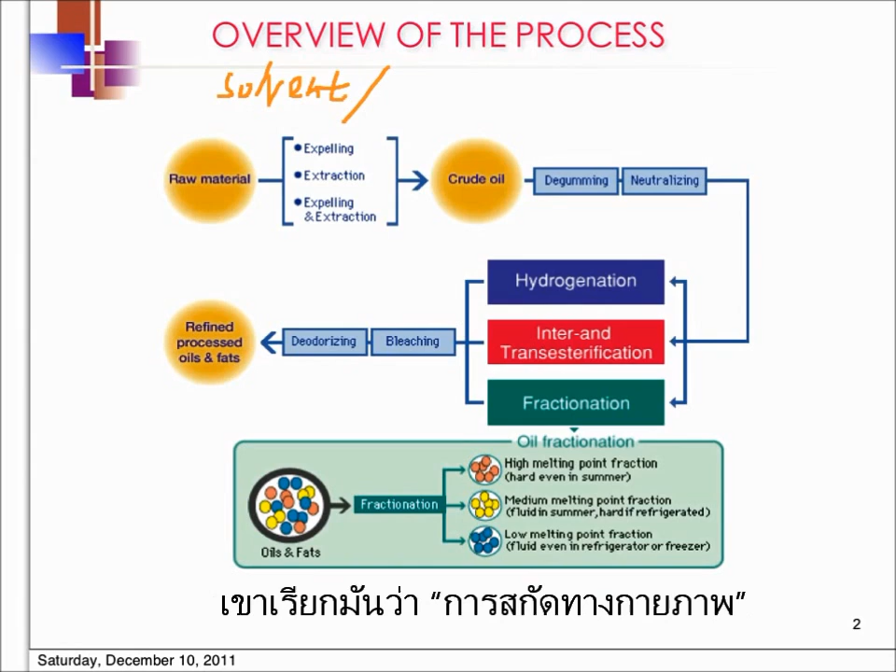So for this purpose, we can use two types of extraction. We can use an organic solvent. So this is a solvent extraction, which will extract the fat or the oil from the fruits or from the seed. And another process is without using solvent, which basically we call physical extraction. So usually this is using a mechanical press, for example a screw press, to expel or to extract the oil physically out from the seed or from the fruit.

At the end of the extraction process, what we'll get is the crude oil. So the crude oil usually contains a lot of undesirable components such as free fatty acid, FFA, or it can contain phospholipids, pigments, and a lot of moisture. So this is something that is undesirable.

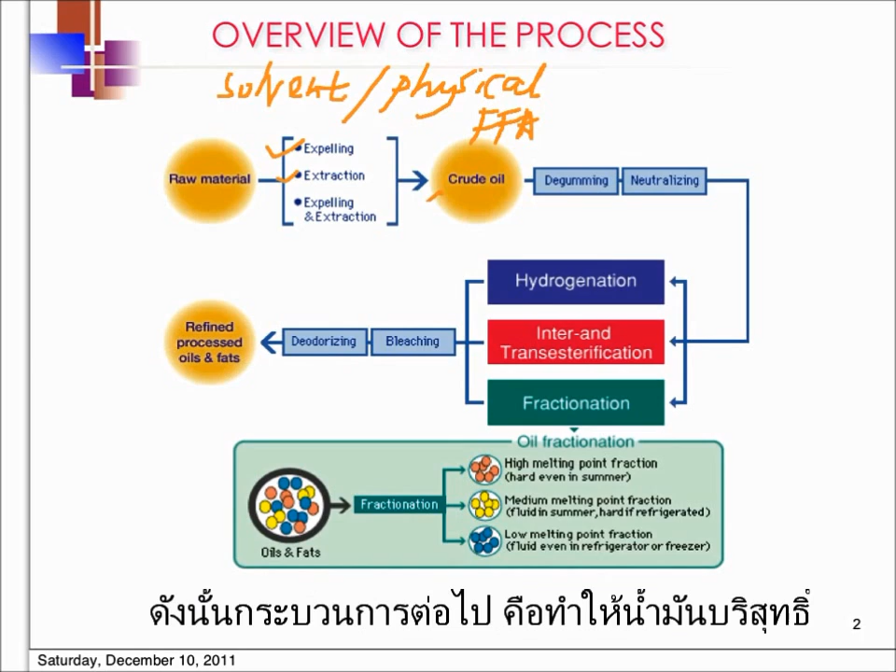So the next process is to purify the oil, and basically this is what we call the stage or the process of refining. To refine the oil, to remove as much as possible the undesirable components from the crude oil. So the first stage of the oil processing is to extract the oil to get the crude oil. Then after that, refining.

Then the second major stage in the oil processing is the modification. The objective of modification is to modify the properties of the oil to produce oil products with different physical properties. Some of these modification processes are, for example, hydrogenation. This is a very widely used process in the industry to increase the melting point and solid fat content of the fat. So usually we use this process to produce a product like margarine.

Then there is also the interesterification process and also the fractionation process. So the idea of this modification process is to produce various types of oil products which have higher value and which can be used for many food applications.

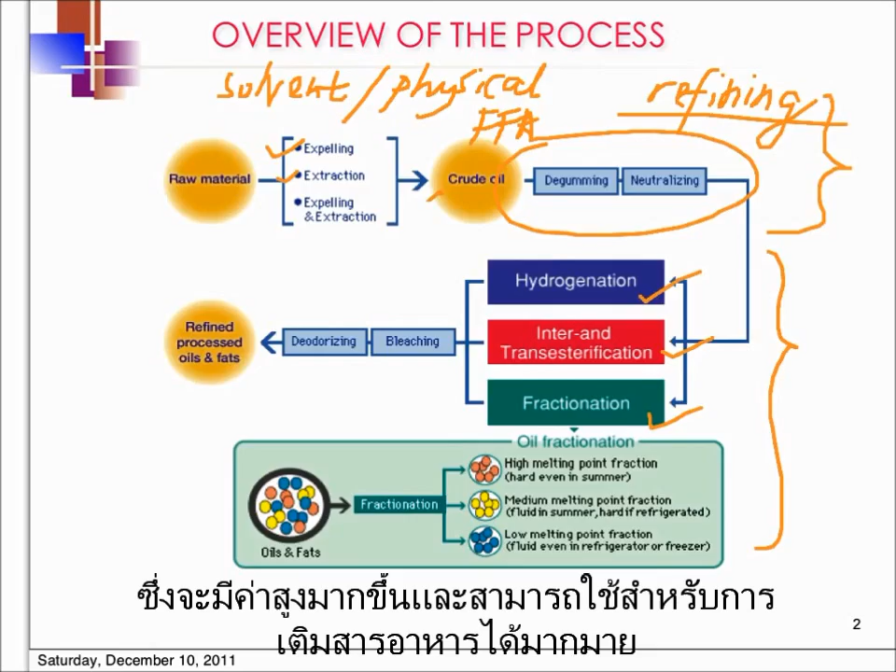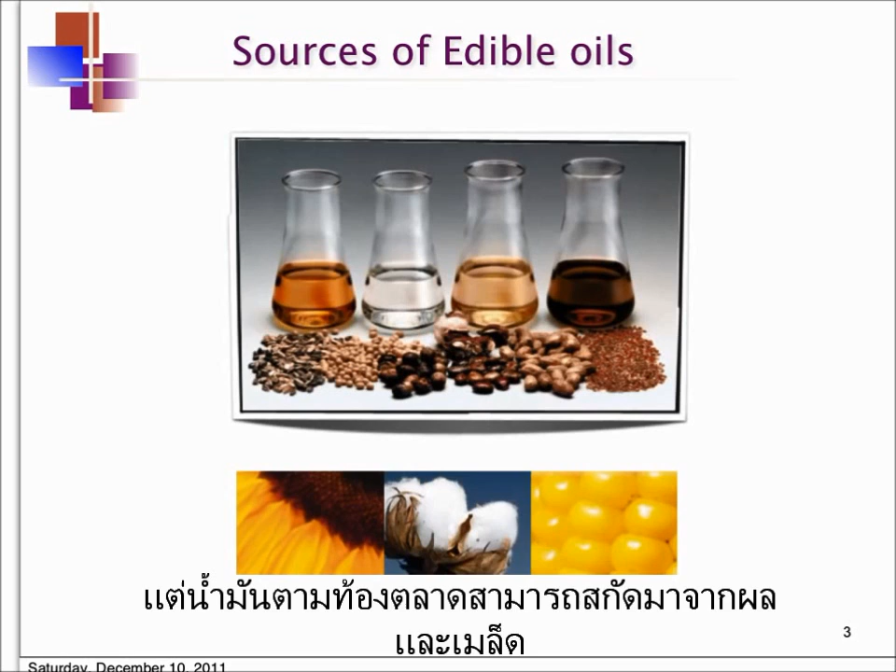You may be familiar with a few types of vegetable oil, but commercial oil can be extracted from various types of seeds and fruits. So for example, on this slide you can see that oil can be extracted from the soybean, from the oil palm fruits, from canola, from sunflower, from the coconut flesh, and from the palm kernel.

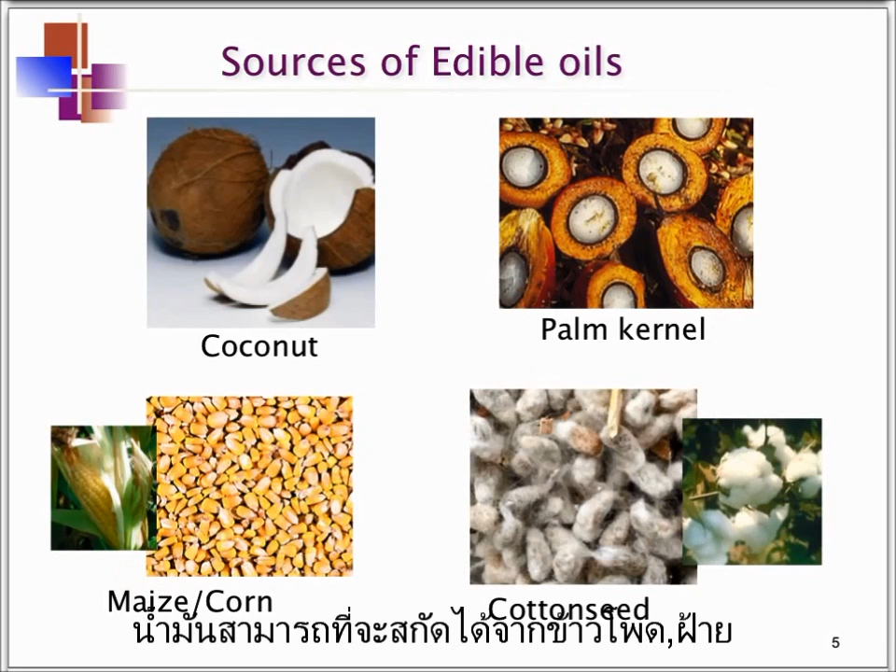So for the oil palm, this is the oil palm fruits. The red, the orange flesh outside is from where we can get the crude palm oil, and the white flesh inside, this is actually the palm kernel, and we can extract the palm kernel oil, which has different physical and chemical composition, from the palm kernel part. Then oil also can be extracted from corn, from cotton seed, from olive, linseed, sunflower, safflower, and from castor.

The tree is still not very tall, so you can see the fruit bunch between the fronds like this. So you have to be very careful because there's a sharp thorn between the fruit bunch. If you're not careful, you can get your fingers or your hand injured.

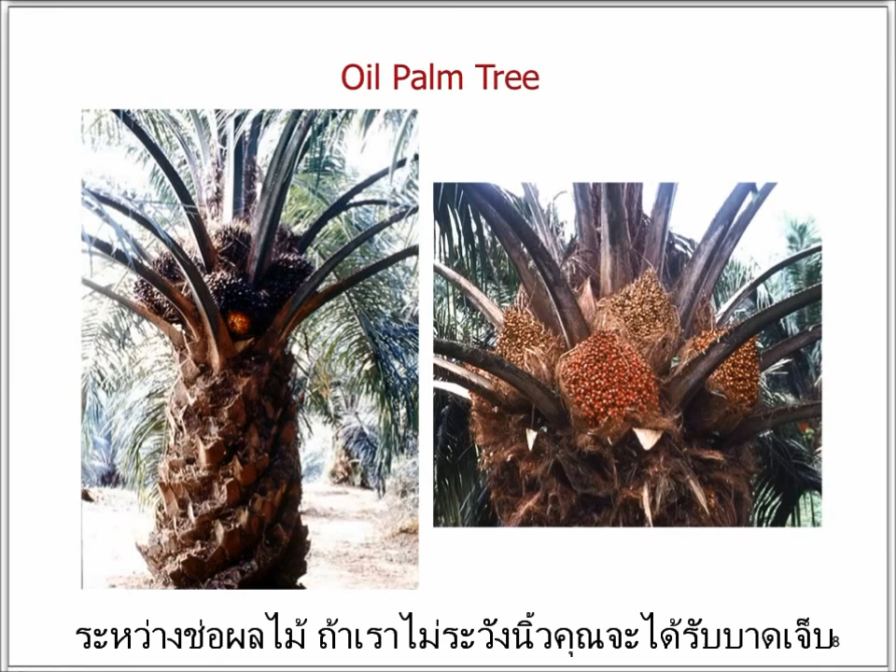So after the extraction, from the mesocarp or the outer flesh, we can get the crude palm oil. The color is very dark orange, and here you can see in this picture the oil has actually separated into two layers. The bottom layer contains a lot of insoluble components or phospholipids and other things that need to be removed, and the upper layer is basically the oil.

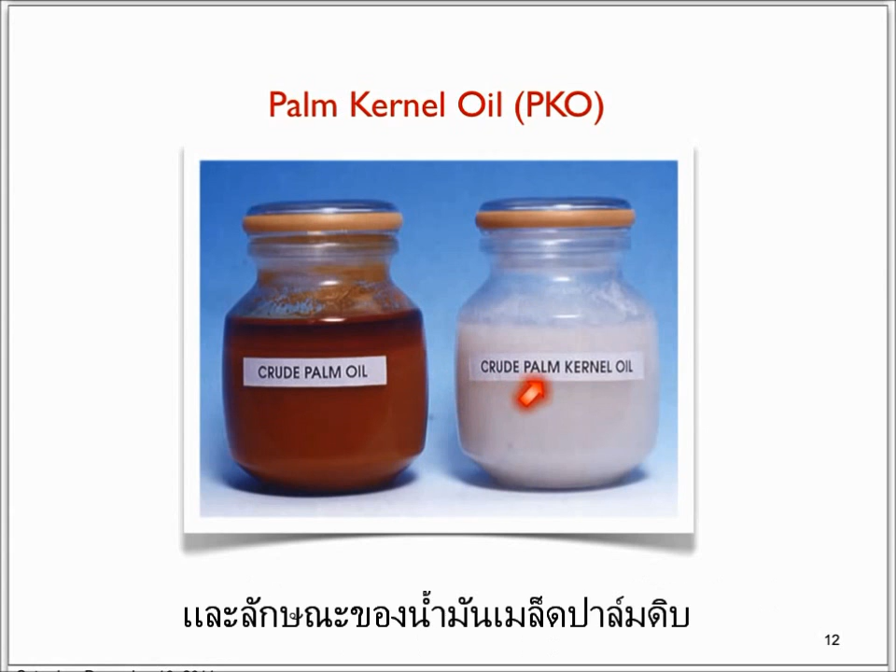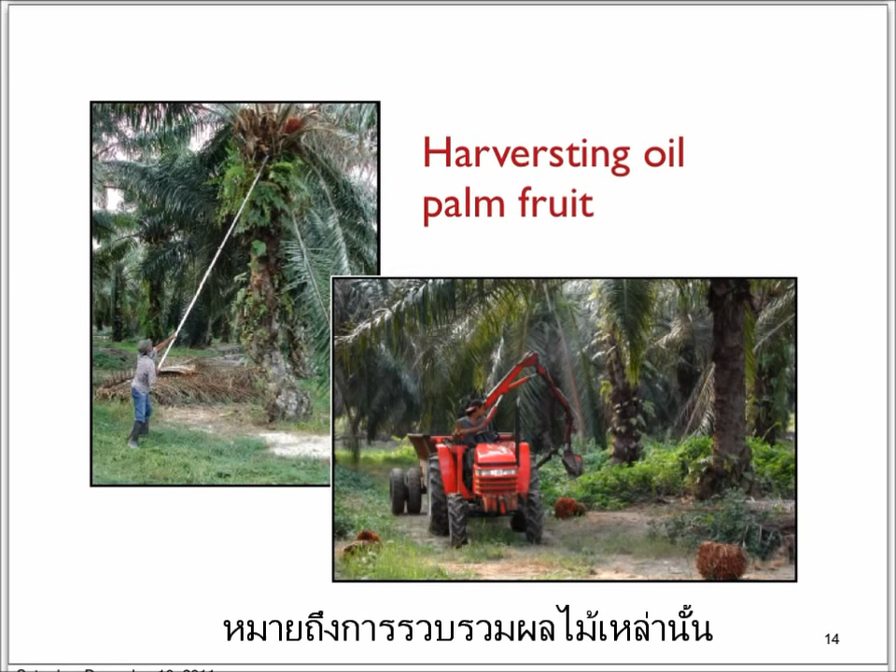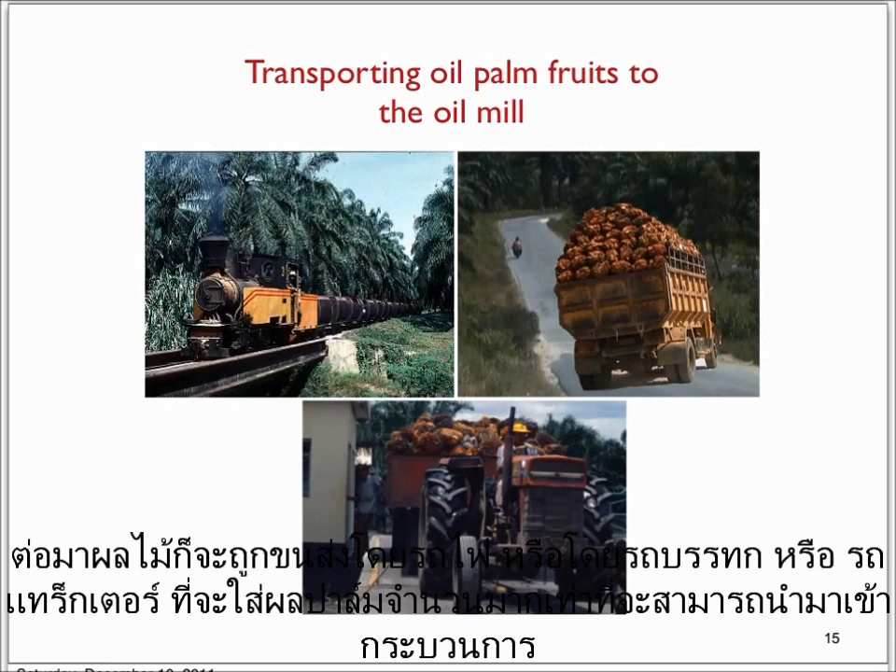Then the fruit bunch will be collected. These days we can use the tractor or modern means to collect the fruit. Then the fruit will be transported by train or by lorry to the factory. As you can see here, the tractor brings a full load of oil palm fruits into the factory to be processed. So if you live near the plantation, sometimes you can see the fruits being transported by a train here, and this train actually will go to the factory.

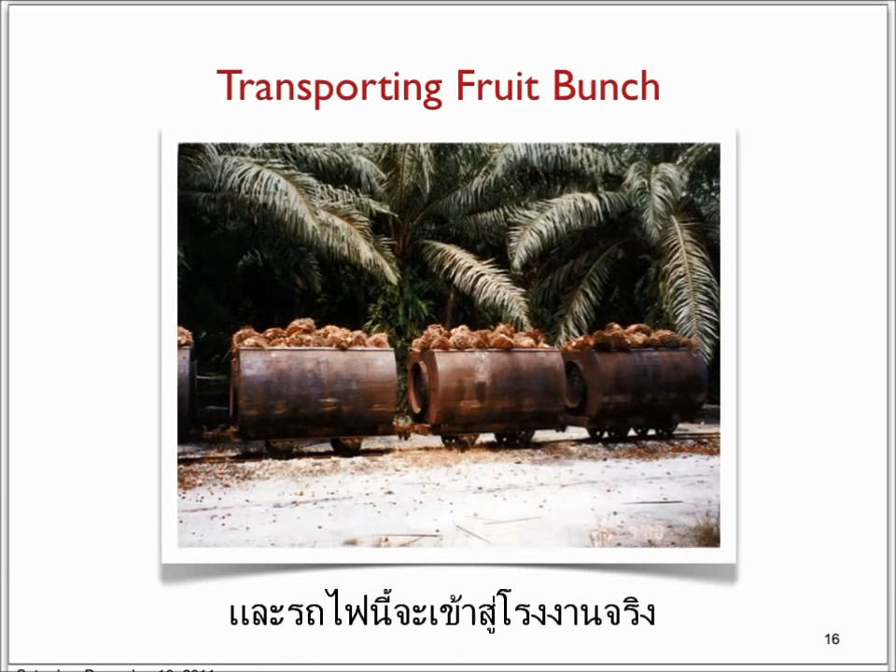And this is how the palm oil mill looks like. So you can see the oil palm fruit bunches being stored in the open space here, and inside here is where the processing takes place.

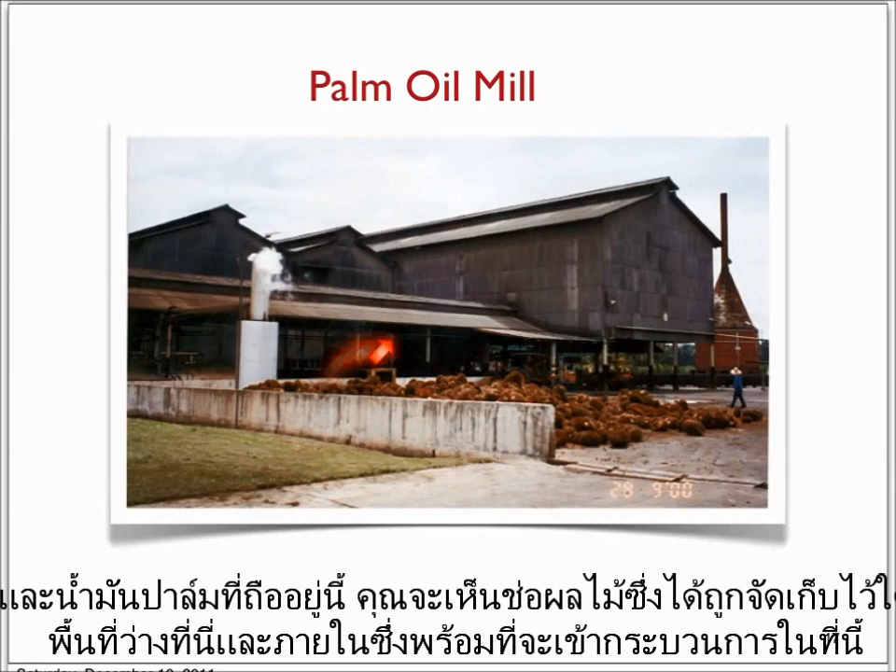So now let's look at the extraction process. And before that, we can see again this nice picture of the fruitlets from the oil palm fruit bunch, and a picture of the kernel. The outer shell of the kernel is actually very hard, so to get into the white flesh inside, the shell has to be broken before we can extract the oil from the palm kernel.

So for the preparation of the oil palm fruits before processing, usually they go through the sterilization process. Before pressing out the oil from the oil palm fruits, the first step is the sterilization process, and in this process the oil palm fruit goes through sterilization in the sterilizer.

The function of the sterilization process is to deactivate the lipolytic enzymes. The lipolytic enzymes such as lipase in the oil palm fruits can cause hydrolysis of the triglycerides or the fat to produce free fatty acid, and this is an undesirable chemical reaction that needs to be stopped. So by using the high temperature in the sterilization process, we can deactivate the enzyme and stop the hydrolysis process.

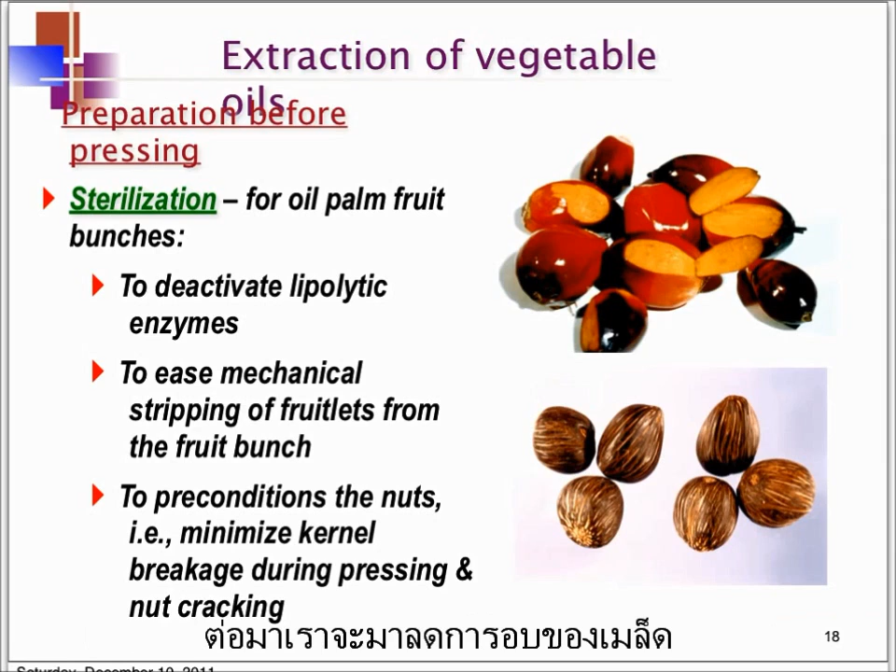And during the process to separate the kernel from the flesh, it will reduce the breakage of the kernel, so this will facilitate the separation of the kernel from the flesh in the processing of the palm kernel oil.

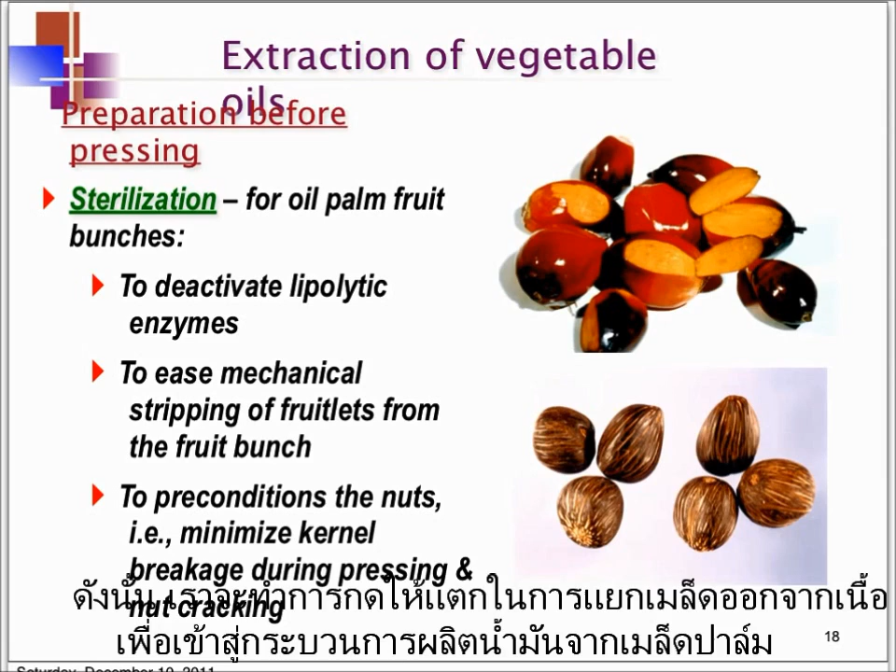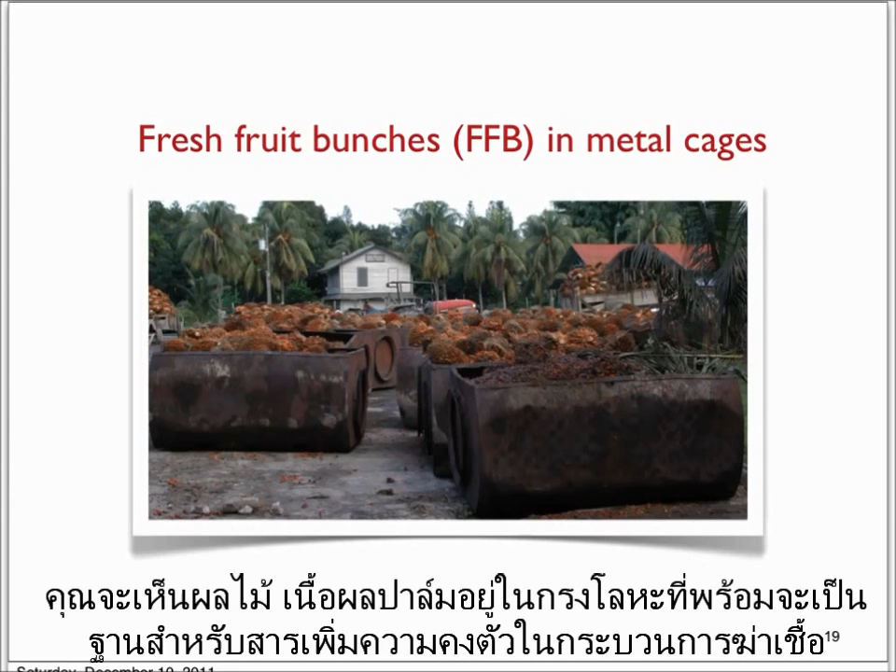So this is a typical sight in the factory. You can see the fresh fruit bunches in the metal cages ready to be loaded into the sterilizer for the process of sterilization.

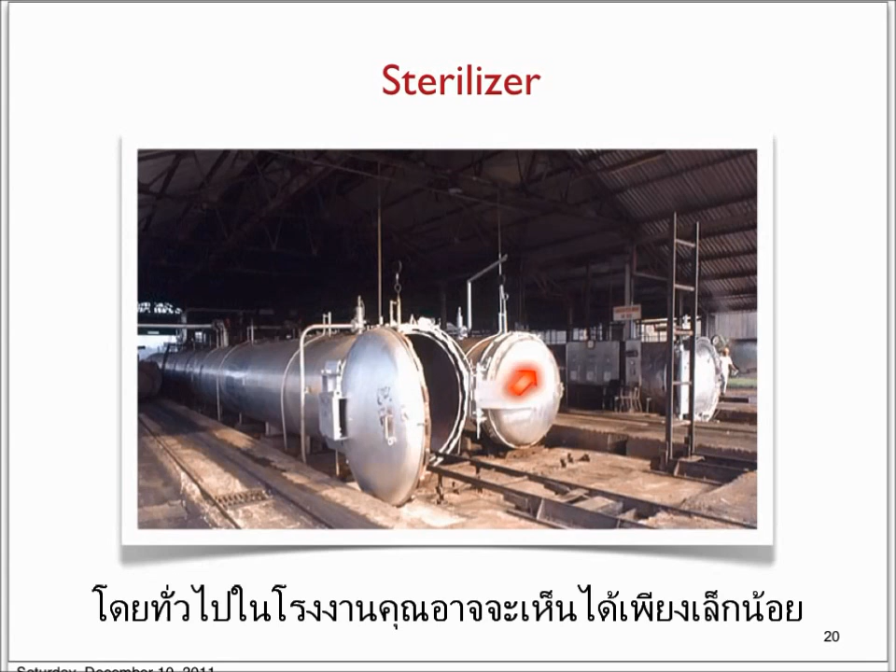And this is the picture of the sterilizer. You can see the long barrel of the sterilizer, and the door here, and this is the rail where the metal cage will come in from this direction and will push through into the sterilizer. So typically in the factory you can have a few sterilizers for the sterilization process. And in this picture you can see the metal cage containing the fruit bunch is being pushed inside the sterilizer.

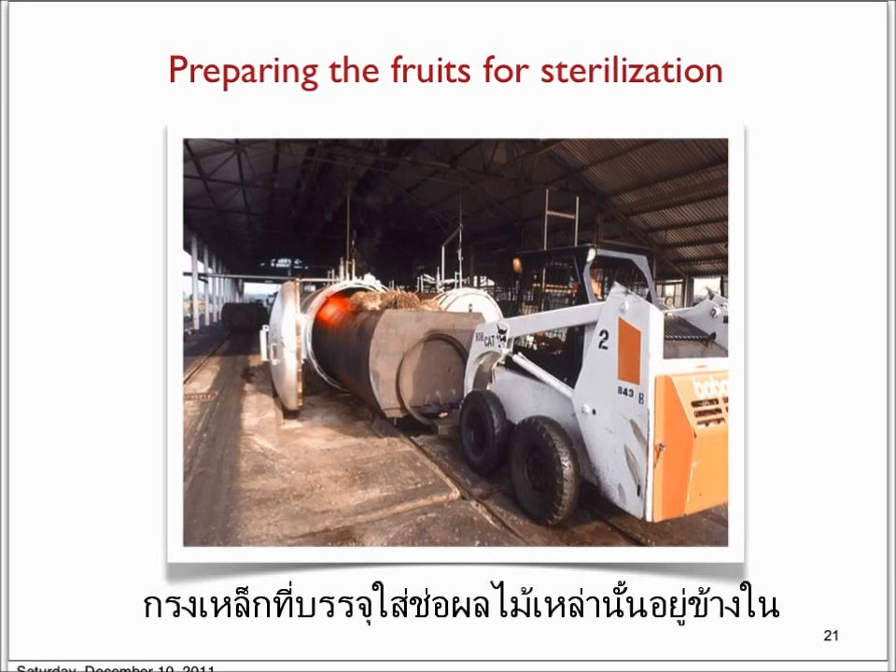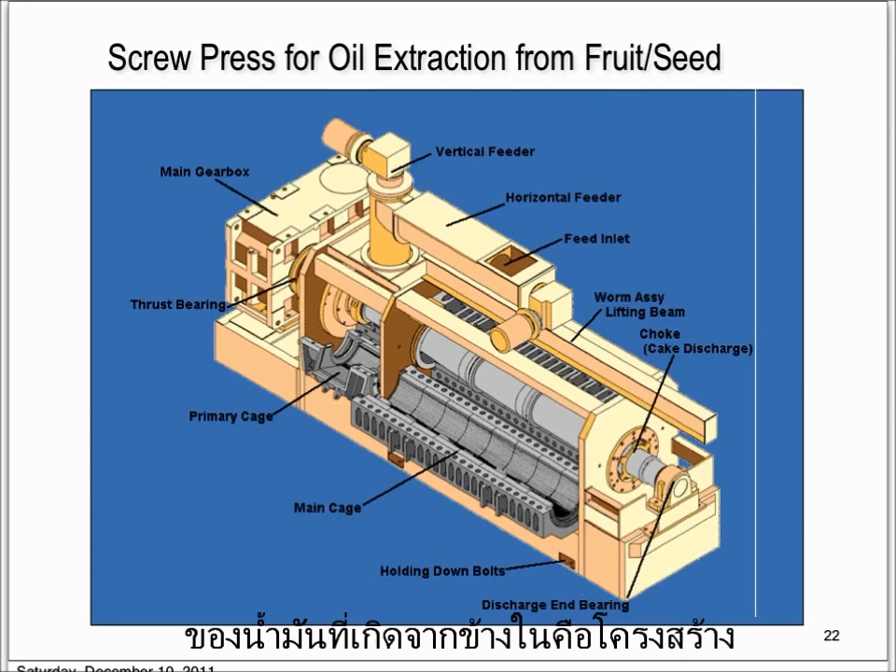And this is an example of the schematic diagram of a screw press. This might not be the same type that we normally use in the extraction of palm oil. In this case, this is actually the screw press for the oil extraction from the fruit or from the seed. So basically, it consists of the screw here, and the feed inlet here, and the cage, the metal cage, and the outlet for the oil, and the process of extraction of the oil will occur inside this structure.

Then the next process is stripping, which is the process to separate the fruitlets from the fruit bunch. And this will go through the extraction process to extract the oil, and then the purification process to remove the majority of the undesirable components in the crude oil. Then finally we get the crude oil. But at this stage, the crude oil still contains a high amount of free fatty acid, maybe between 3 to 5%. It contains gums, phospholipids, waxes, pigments. So this needs to be removed in the process of refining.

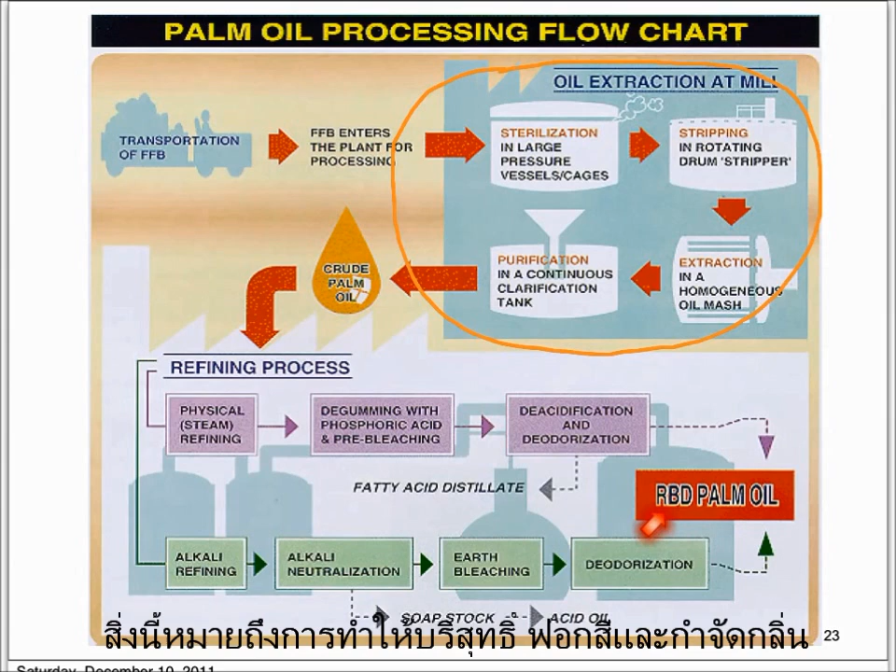And we will look at the refining process later, but basically we can use physical refining by using steam, or we can use chemical refining by using alkaline process. But both, whether physical or alkaline refining, the idea is to remove the gums or phospholipids, free fatty acid. So various stages of refining, and finally we will get the refined oil. RBD palm oil here means refined, bleached, and deodorized palm oil. And we can get various byproducts from the refining process, for example, fatty acid distillate, or the soap stock.

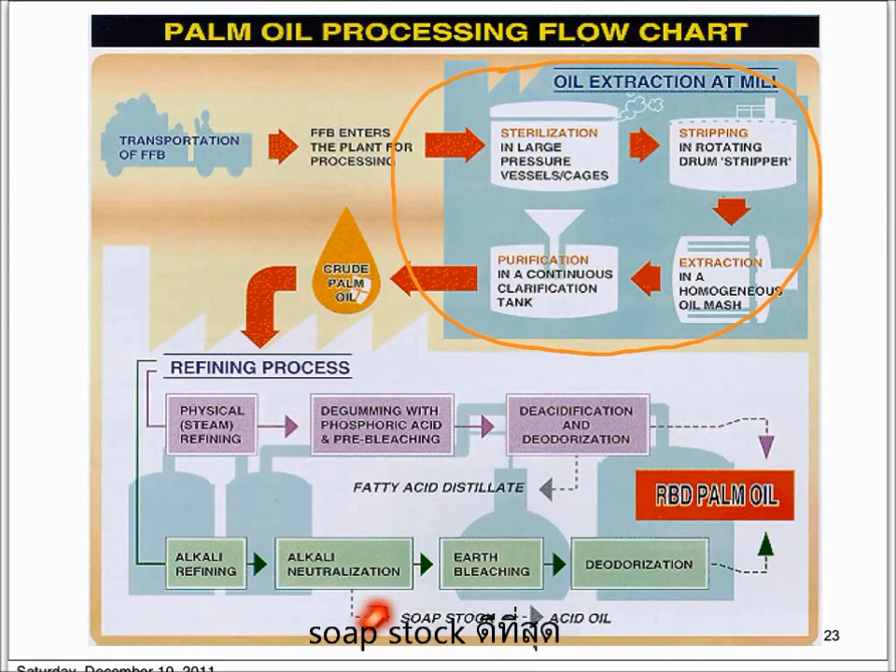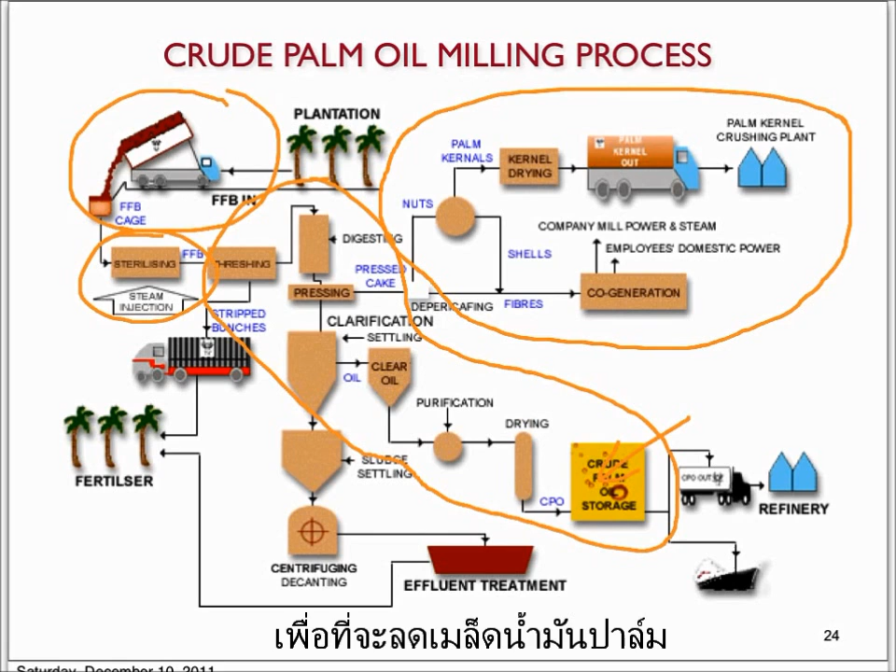This is another picture or flow chart showing the same process as the previous slide. So basically we start by transporting the raw material into the factory, and it will go through a sterilization process, and the whole process here is the stages to get the crude palm oil. And the kernel, which is the middle part of the fruits, will go through a separate process, usually in a different part of the factory, to produce the palm kernel oil.

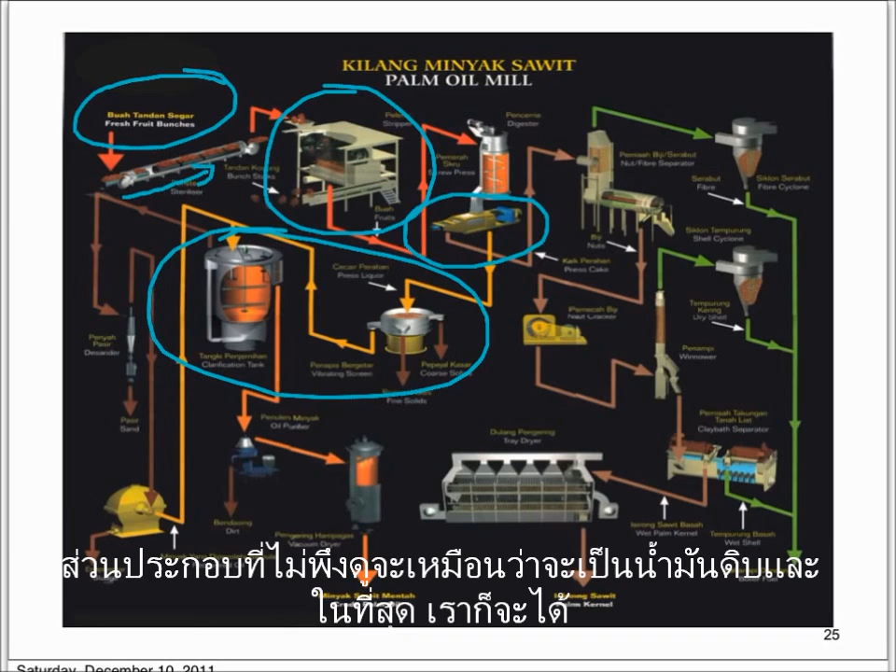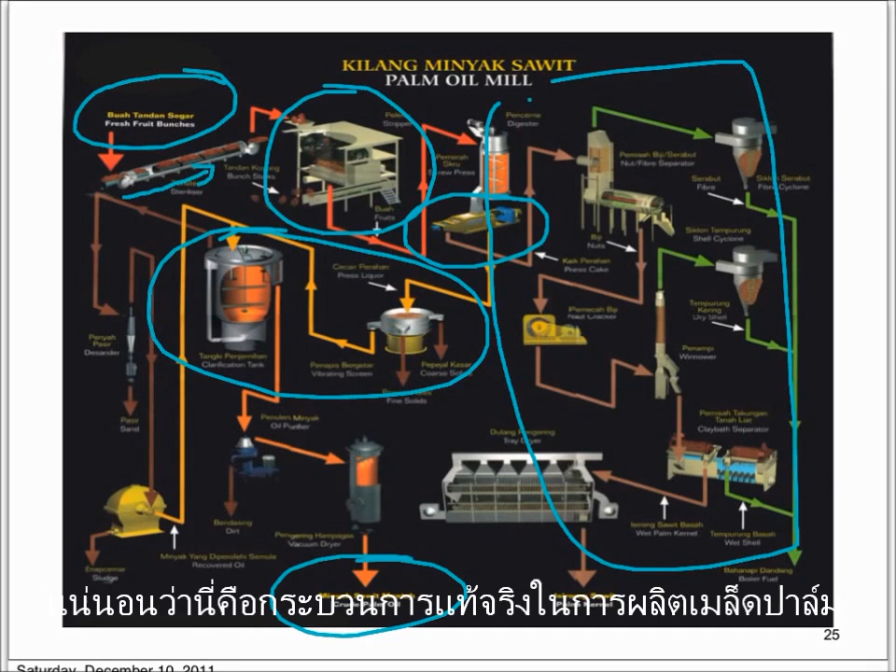And this is yet another flow chart. Looks more complicated, but basically it consists of the same stages to produce the crude palm oil and also crude palm kernel oil. So again, we start here. This is where the FFB, or the fresh fruit bunch, will go in through the sterilizer, then the stripping process to remove the fruitlets from the fruit bunch, then the extraction process here, clarification process to remove the sediments and other undesirable components in the crude oil, and finally we get the crude palm oil. And on this part here, this is actually the process to produce the crude palm kernel oil.